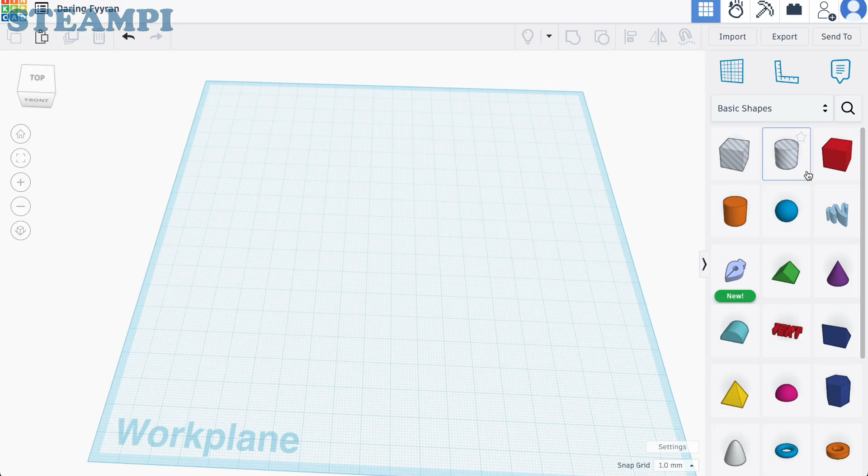Today we're going to build a custom 3D keychain. You can drag a box onto the work plane and change its dimensions to be 25 by 50 by 3. Now we can round the corners.

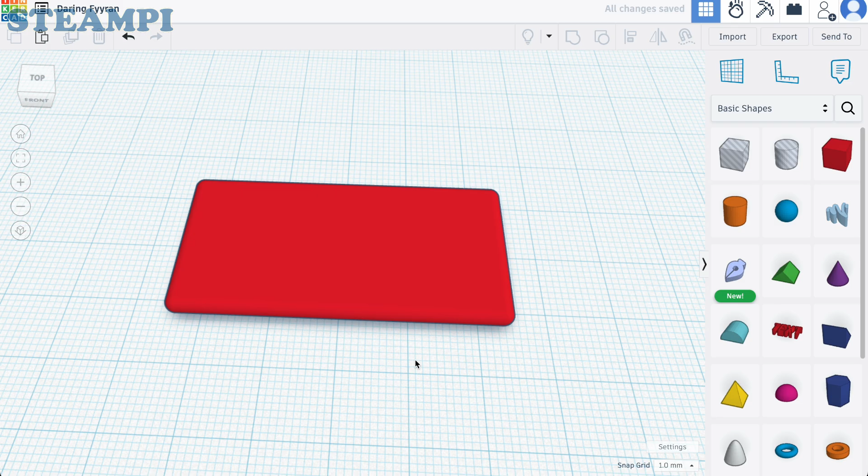After we have your keychain smooth and stylish, we can make a keyring hole by taking a cylinder hole and putting it in the place you want your hole to be at.

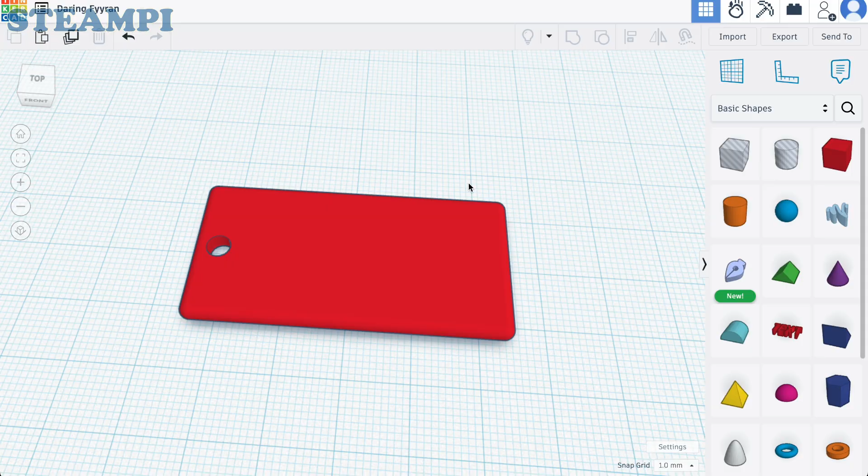Now we can sprinkle in extra shapes for that extra wow factor and add text to personalize the design.

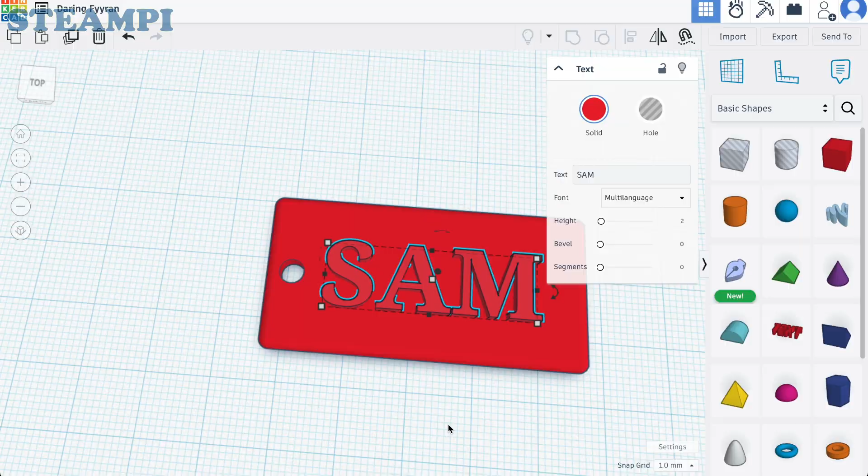If you want, you can also change the color, the font, or the size of your text, and also change the color of the objects that you place on your keychain.

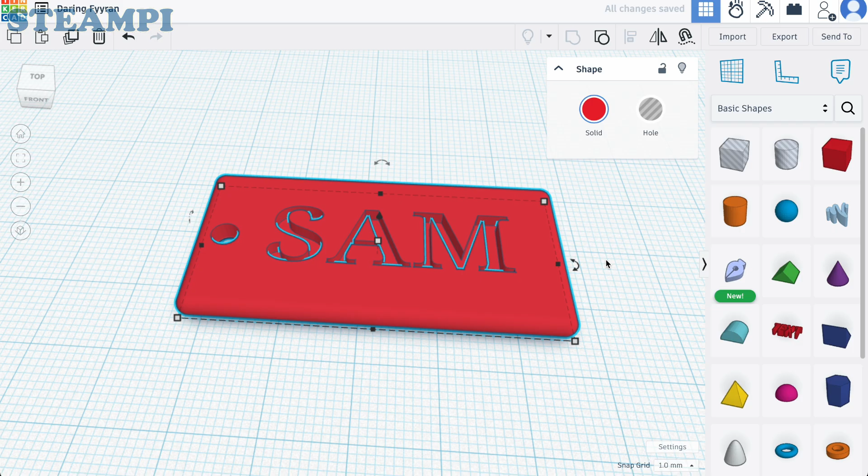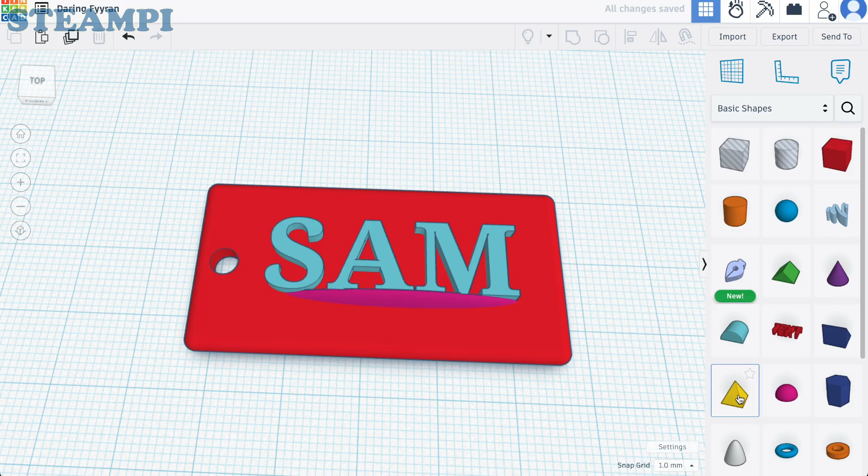You can add various different shapes to your design, such as here where I added a dome. I also added many triangles, and a donut to make the whole look nicer.

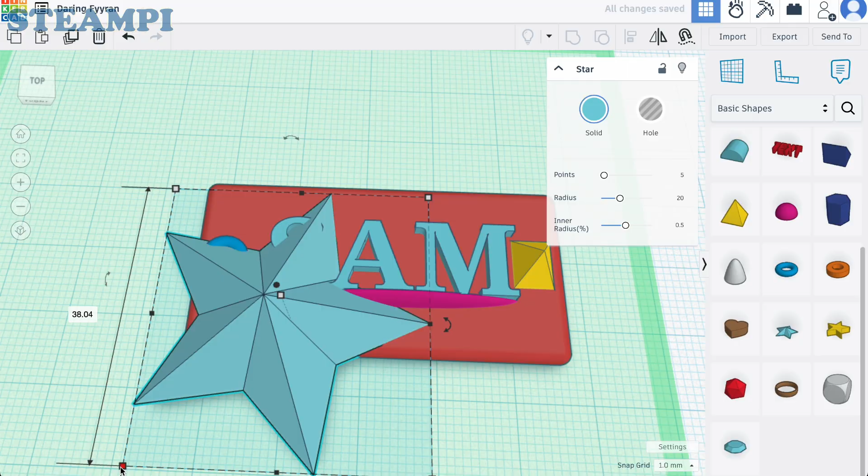I also chose to add some stars. You can change the color of these objects by selecting color on the side.

There are many different objects to choose from in Tinkercad. You can choose whatever you want to make your design custom.

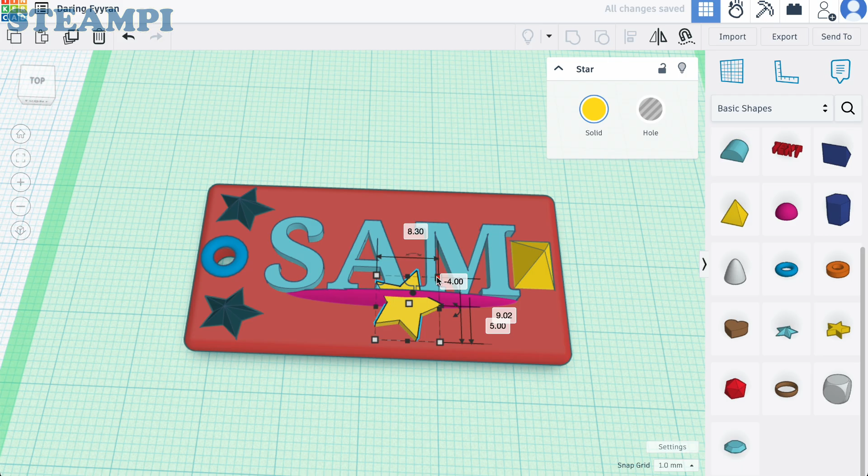Here's a reminder that when you want to make a hole, you have to first make the object holes, then select the object that you want the hole to be through, and select Group on the top right.

Here's my keychain as an example. You can add whatever you want to yours to make it personalized.

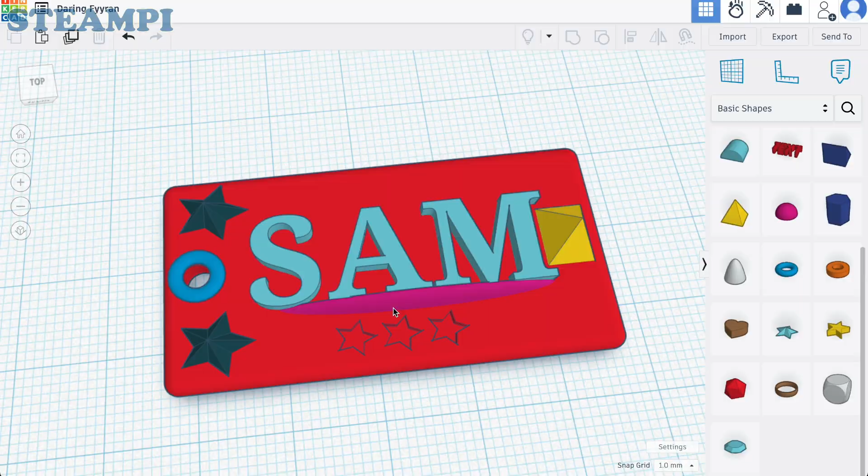We wrap it up by exporting your design as an STL, ready for 3D printing with your favorite filament.

Let's get creative and turn simple shapes into masterpieces you can hold in your hand.